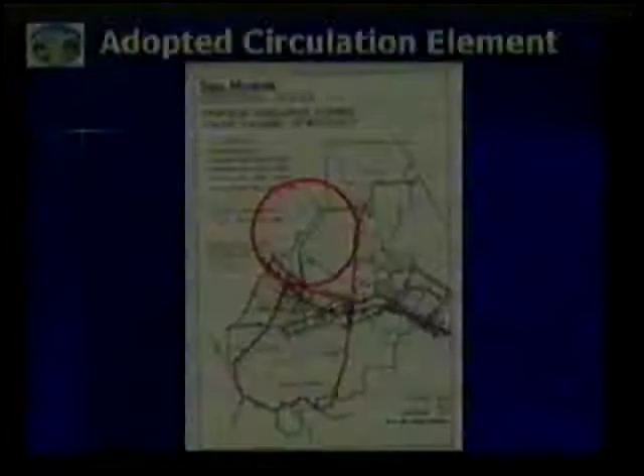A quick question — I see the date on the report was July 19th. When was this study initiated? When did it start? Well, we've been working the last few years on the modeling efforts under the North County sub-area model, basically. We asked RBF this last week to pull the information together as it relates to interpretation of that modeling and compare it to the county's.

So this isn't something new that was done in the last few months? Okay, the modeling the city participated in was done in '04. Can I just ask a quick question, just kind of historical — the council on February 28th said don't spend any money, don't do any studies, traffic studies or anything like that. We're going to wait for the County Board of Supervisors, but here we are with a quasi-traffic study, et cetera. So how did that happen without a vote of the council, or why did that happen?

How did that happen that we're now here where we are? I'll take a shot at that. I wasn't here to hear your direction on that, but my understanding, or at least our interpretation, was that we were not undertaking further modeling or detailed analysis. What Don and RBF have prepared for us is really an overview of the existing modeling that was done in '04, and a comparison and contrast of that information against what the county has done, in both cases with the assistance of SANDAG, to try and make sense out of it in plain English. So it's really not a new study per se — it's an overview. It's basically a letter with some attachments trying to make sense in plain English of the competing analyses that were done prior.

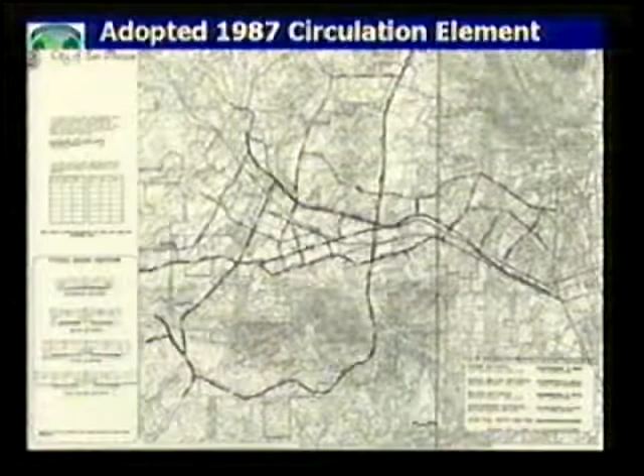There were public questions about the 1987 circulation element that was the focus of the Las Posas Road realignment from Rancho Santa Fe Road extension to Buena Creek, and this shows that it was adopted by the city in 1987.

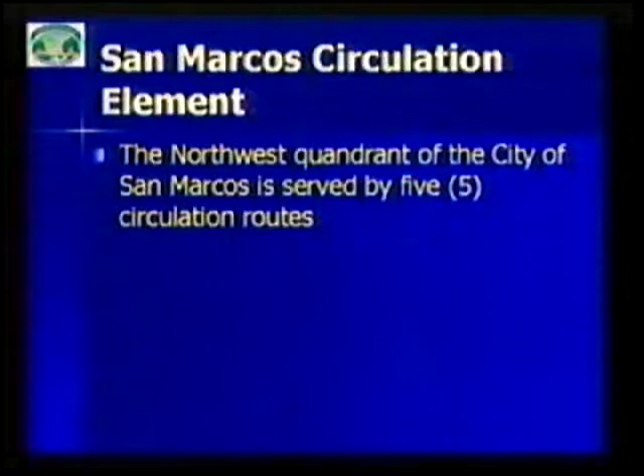As I indicated, the northwest quadrant of the city is the focus tonight. It's served by 5 circulation routes. Wait a minute, Jerry, could you go back to that Rancho Santa Fe thing again — back when council adopted it? 1987. But wasn't Rancho Santa Fe pulled? Yes. And when was that pulled?

Well, how could we adopt the Rancho Santa Fe extension if it had already been pulled? No, you had discussion on it — it was originally on a circulation route and it was taken off. Basically, the 1987 map shows Las Posas Road as the primary north-south connection road after Rancho Santa Fe was pulled off. Rancho Santa Fe was scheduled to extend clear up to Buena Creek. That's correct.

With the project that was on the books at that time, it was removed. There was a lot of discussion, and there was an amendment to eliminate that. As a result of that elimination, Las Posas Road was put in its place.

So if Rancho Santa Fe would have been to the west of Paloma, then they wouldn't have had Las Posas up through their community. That would have been the north-south route, as opposed to Las Posas.

Mr. Mayor, just a clarification, Jerry, so that everyone understands it. Back in '87 or thereabouts, what you're saying is that Rancho Santa Fe was going through to Buena Creek at some point in time. That was on the circulation element. That's right. That was changed by council, to go to Las Posas instead. No, prior to '87 it was just pulled off, Jerry. We didn't jump it over, we didn't put it to Las Posas until that development came in.

When you adopted the college area community plan, there was a lot of discussion that led up to that, and Las Posas was made the primary north-south route, in replacement in lieu of the other one. But it was the majority of the council that did it.

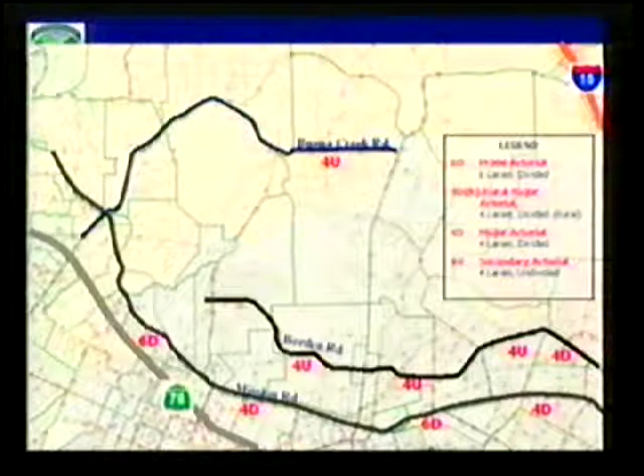To summarize the 5 circulation routes that service this quadrant of the city: east-west roads are Mission Road on the south, north of Highway 78, Borden Road, and Buena Creek as the primary east-west roadways. North-south roadways are Twin Oaks Valley Road and Las Posas, and you can see at the end the blue dashed lines are the potential extension consistent with the circulation element. The lettering also indicates the classification of the roads as shown by the legend, 4U typically being 4-lane undivided as opposed to a 6-lane divided or other designation.

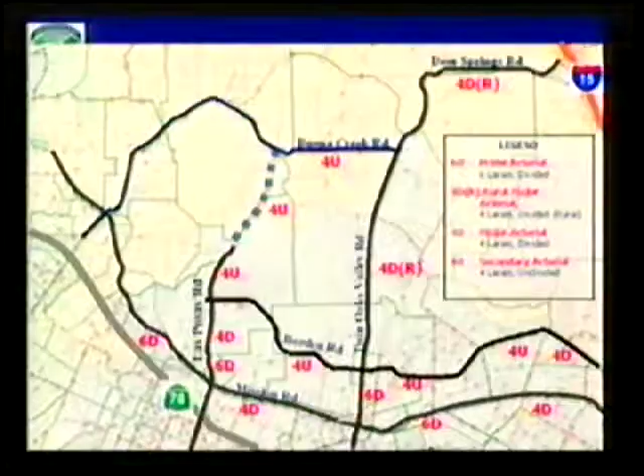There were 2 traffic modeling efforts done recently: the North County SubArea Traffic Model, which the city has been involved with alongside 4 other jurisdictions in North County, as well as SANDAG and RBF. There's also a county traffic model that tested alternative circulation networks, which they're about to discuss amongst the County Planning Commission and Board of Supervisors.

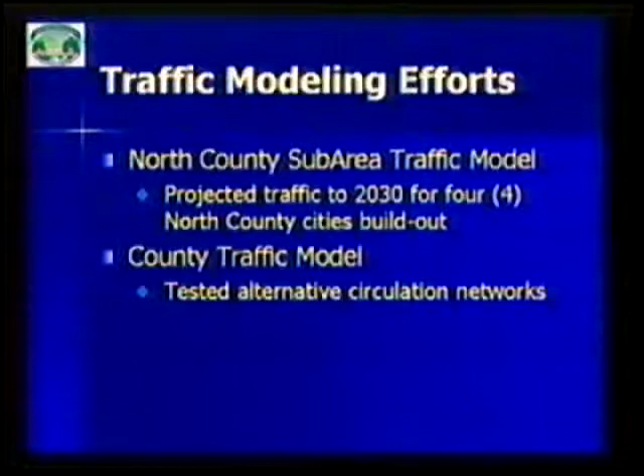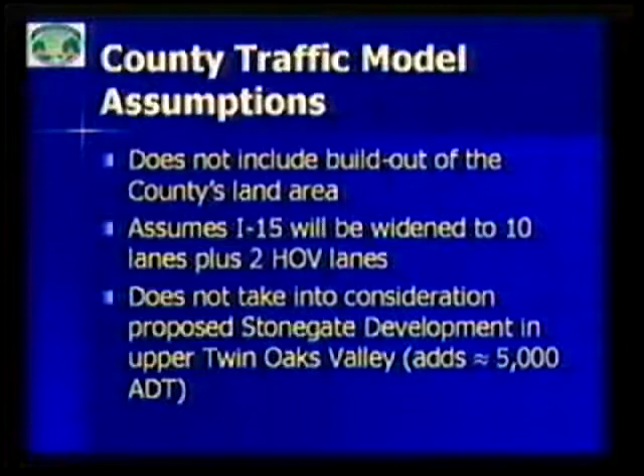It's important to note the traffic model assumptions regarding how volumes are generated. The assumption is that there's no build-out of the county land use plan, whereas with our North County jurisdictional models, all the cities project full build-out of all their land use areas. The county model also assumes I-15 will be widened to 10 lanes plus 2 HOV lanes, whereas the city's model only models it at 8 lanes. And the county's modeling does not take into consideration the proposed Stonegate development in the upper Twin Oaks Valley, which would add approximately 5,000 average daily trips.

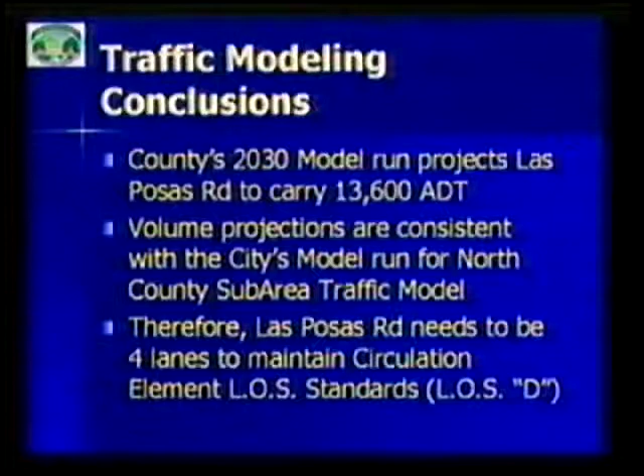Traffic modeling conclusions are that the county's 2030 model run projects Las Posas Road to carry 13,600 average daily trips. This volume projection is consistent with the city's model run for the North County SubArea Traffic Model. Therefore, the conclusion is that Las Posas Road needs to be 4 lanes to maintain a circulation element level of service standard of D. In your packet, you have a table showing different road classifications and what triggers service levels A through F, which is failure. It's important to note how volumes correlate to levels of service.

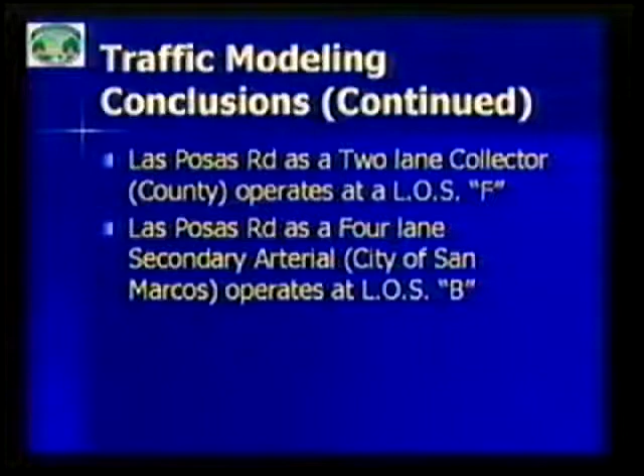In terms of the conclusions of the traffic modeling, Las Posas Road is classified as a 2-lane collector by the county. It operates at LOS F, that's failure, because it's only a 2-lane roadway and cannot handle the over 13,000 trips per day. As a 4-lane secondary arterial, which is the city's current classification, it would operate at LOS B.

The county staff recommendation that will be presented to their board is to retain Las Posas Road on the county circulation element, but only as a 2-lane collector. This was primarily based on the staff report of the county, which looked at potential impacts to the MSCP preserve system in this particular area.

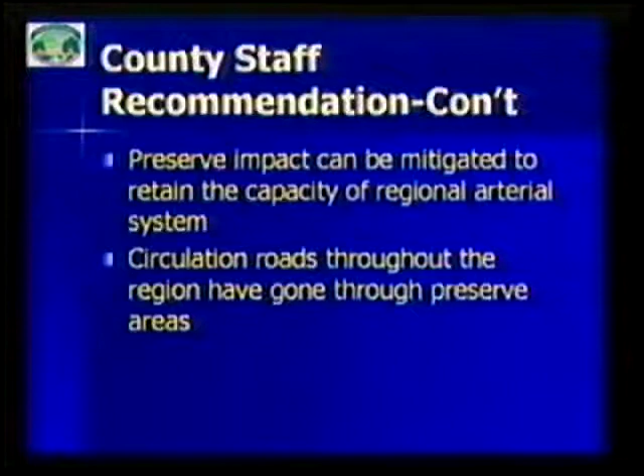Staff feels the impact created by the road extension can be mitigated to retain the capacity of the regional arterial system, and that circulation roads throughout the region have gone through preserve areas with mitigation. It's not the best situation, but they can be mitigated. We've seen this with Scripps Poway Parkway, Twin Oaks Valley Road, and others in Chula Vista currently being planned to go through preserve areas. But there's a balance between environmental mitigation and the need for circulation.

We'll get into two documents that have looked at the regional areas: the North County Parkway Plan, a collaborative effort of the various North County jurisdictions to assess regional improvement projects and set priorities on those projects. This plan also identified the need for and established a regional road linkage, which included Las Posas Road and Buena Creek. The SANDAG Regional Transportation Plan also outlines the regional network links it feels are necessary to provide access to the state highway network, and Las Posas is included as part of this plan and network.

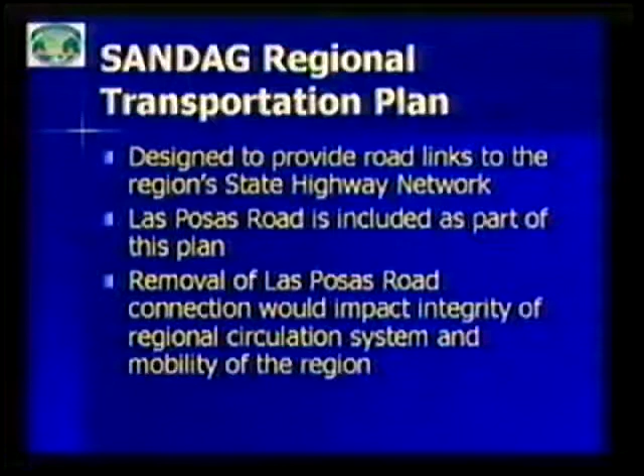It's felt that removal of this Las Posas Road connection would impact the integrity of the regional circulation system, as well as the mobility of the region.

Implications of removal of Las Posas Road from the circulation element: it would require redistribution of the over 13,000 average daily trips onto the remaining circulation network, primarily Twin Oaks Valley Road, Borden Road, and Buena Creek. It's estimated that 80% of this 13,000 would be distributed to Twin Oaks Valley Road. Without Las Posas, Twin Oaks Valley Road would go deficient in terms of our LOS criteria.

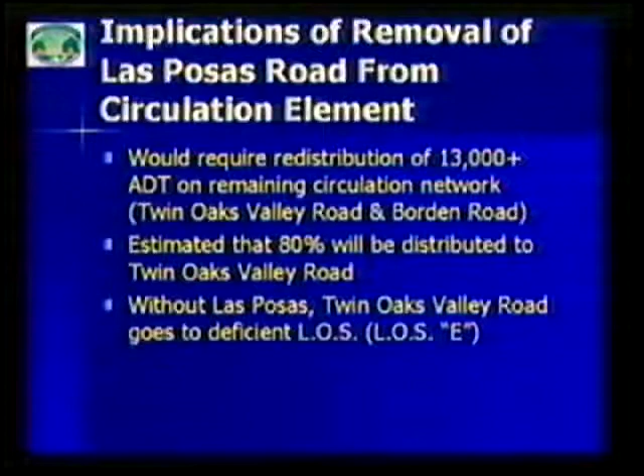Jerry, before you go any further, go back to that one, please. Now, where would that 13,000 come from? That's if Las Posas Road didn't go north to tie into Buena Creek. That would be the projected future volumes from that road that would have to be distributed on the other existing roads. Where would the 13,000 come from?

That comes from traffic modeling that the county did. That was the county's number, basically indicating, taking all the land use that would be built - at least from the county standpoint, not totally built out, but a majority of their build out - and where those trips would be distributed. Those are the links they projected would handle the trips if they were out there.

So you're saying that the 13,000 would come from the county into our city through Las Posas? Is that what you're saying? Intra-regional trips. Okay, thank you.

There's also discussion and concern on environmental review of Las Posas. Las Posas was part of previous environmental documents, none of which were timely challenged. It's important to note that there is no final design - there's not even a preliminary design for Las Posas Road.

Typically, when you do a CIP project for a road link or connection for construction, you're usually at 90 to 100% design, so you know exactly where it's going to go, the alignment implications, and what happens on the ground from an environmental impact standpoint. Since that doesn't exist, you really can't do an environmental analysis of that road extension. It will be required to be done before actual construction, if it does take place.

We have to go forward. So no environmental review can be conducted at this point in time until that occurs. At this point in time, staff recommends a note and file.